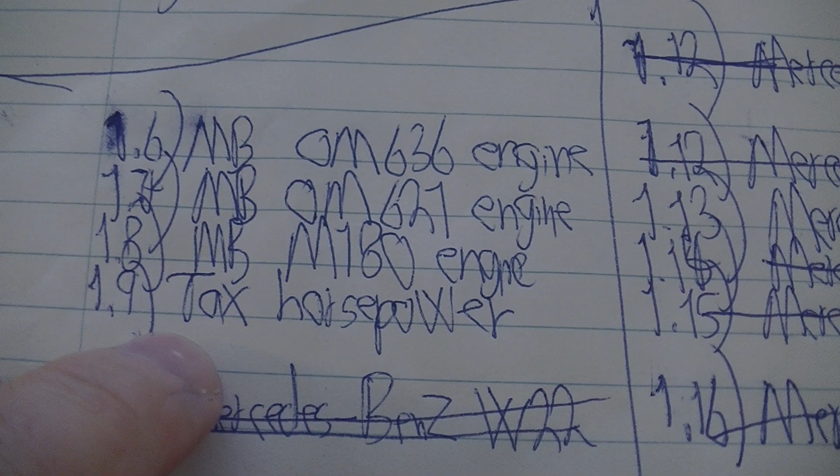Yes, I need to adjust the camcorder a little bit. Yes.

No, they are too old, they are too old and expensive. But I could get an old Mercedes from the 90s, like 1990 something, 95.

Mercedes-Benz 220 Cabriolet W187. Overview: Manufacturer Mercedes-Benz. Production 1951-1955, 18,514 built: 1. Saloon 16,154, cab. A 1,278, cab. B 997, Coupe 85. Body and chassis class: luxury car. Body style: 1951-54 4-door saloon, 1951-54 2-door Cabriolet B, 1951-55 2-door Cabriolet A, 1954-55 2-door coupe. Layout: front engine, layout powertrain engine 2,195 cc, 2.2L, M180 i6. Transmission: 4-speed manual. Dimensions: wheelbase 2,845mm (112.0 in), length 4,507mm (177.4 in) minus 4,538mm (178.7 in), width 1,685mm (66.3 in). The Mercedes-Benz W187 is a luxury car produced by Mercedes-Benz from 1951 to 1955.

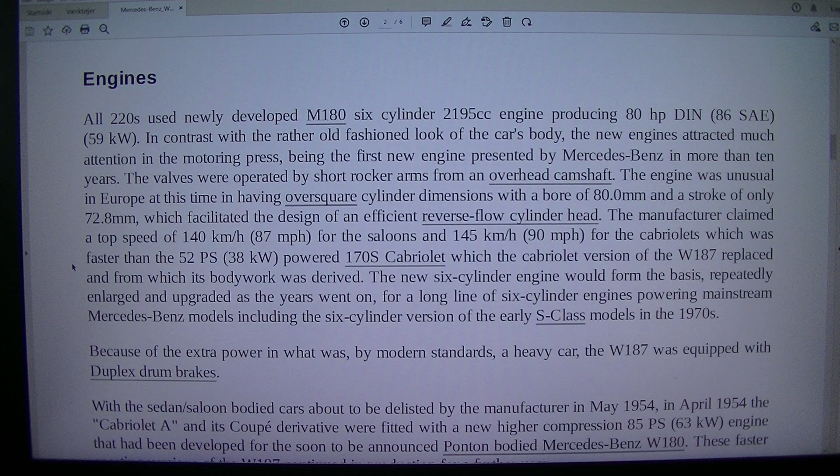Because of the extra power in what was, by modern standards, a heavy car, the W187 was equipped with duplex drum brakes.

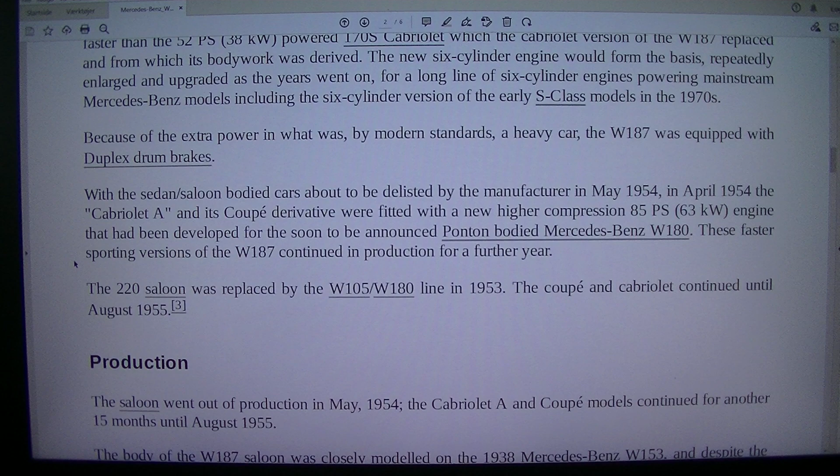With the sedan/saloon-bodied cars about to be delisted by the manufacturer in May 1954, in April 1954 the Cabriolet A and its coupe derivative were fitted with a new higher compression 85 PS, 63 kilowatt engine that had been developed for the soon-to-be-announced ponton-bodied Mercedes-Benz W180. These faster sporting versions of the W187 continued in production for a further year.

The 220 saloon was replaced by the W105/W180 line in 1953. The coupe and cabriolet continued until August 1955. Production: the saloon went out of production in May 1954. The cabriolet and coupe models continued for another 15 months until August 1955.

The body of the W187 saloon was closely modeled on the 1938 Mercedes-Benz W153, and despite the modern engine that powered it, already looked old-fashioned to many observers on the day it was introduced.

Two years earlier, in 1949, the Borgward Hansa had served notice that car design had moved on since the 1930s, and the manufacturer's own 1953 W120 confirmed that modern European cars were following the North American trend toward lower, wider-bodied designs. This has been seen as an explanation for the W187's own unusually short production run of slightly above 3 years for the saloon and less than 5 years for the longest-lived of the cabriolet models.

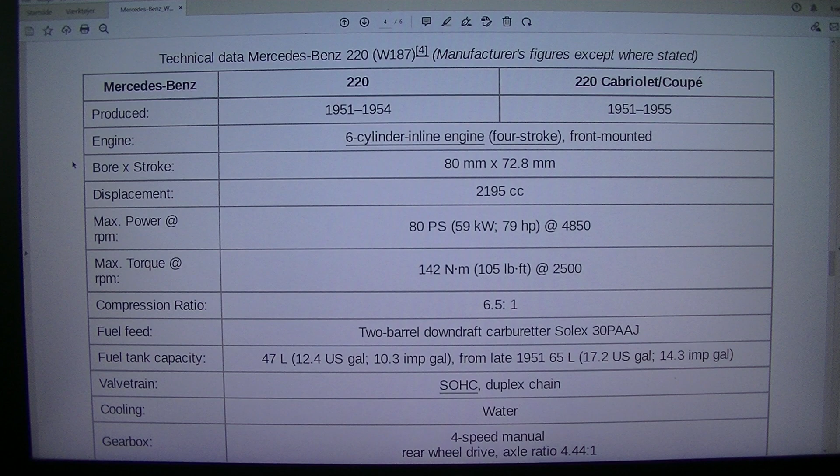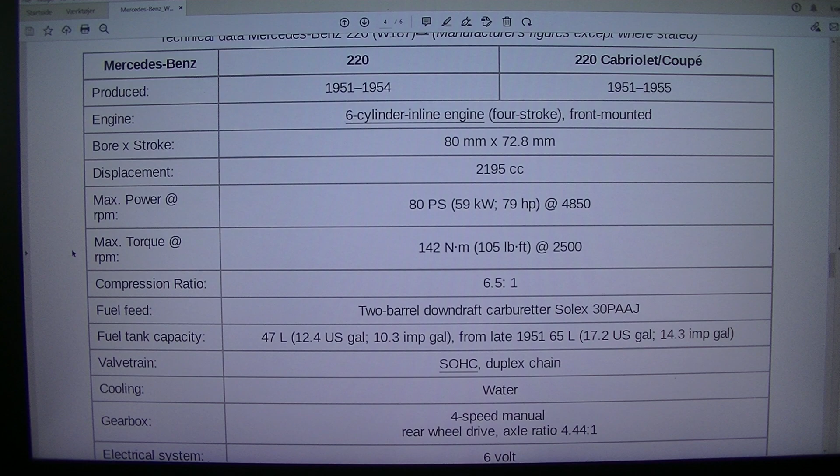Specifications: technical data for the Mercedes-Benz 220, W187, manufacturer's figures except where stated. Mercedes-Benz 220 and 220 Cabriolet/Coupe produced 1951 to 1954/1955. Engine: 6-cylinder inline engine, 4-stroke, front-mounted, 80 mm x 72.8 mm stroke, 2195 cc displacement. Max power 80 PS, 59 kilowatts, 79 HP at 4,850 RPM. Max torque 142 Nm, 105 pound-foot at 2,500 RPM. Compression ratio 6.5:1. Fuel feed via 2-barrel downdraft carburetor, Solex 30PAAJ. Fuel tank capacity 47 liters, 12.4 US gallons, 10.3 imperial gallons; from late 1951, 65 liters, 17.2 US gallons, 14.3 imperial gallons. Valvetrain: SOHC, duplex chain. Cooling: water. Gearbox: 4-speed manual.

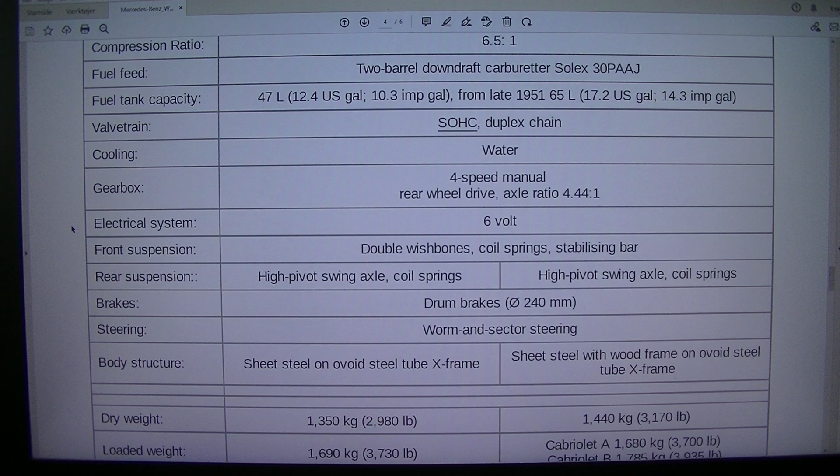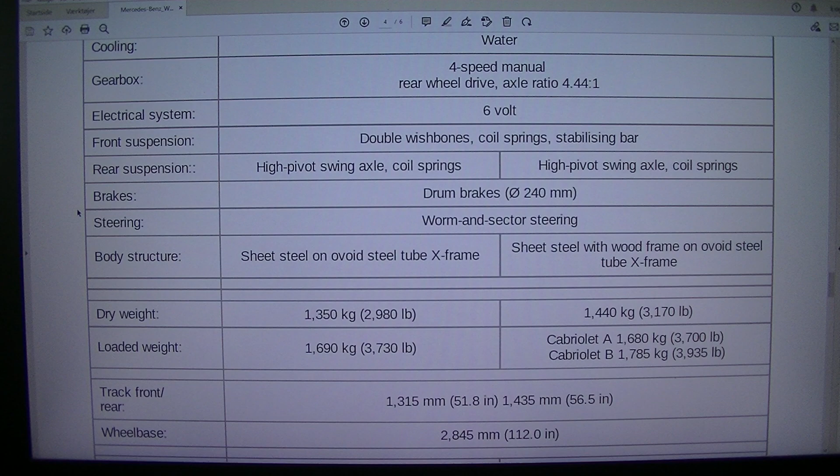Rear-wheel drive, axle ratio 4.44:1. Electrical system 6-volt. Front suspension: double wishbones, coil springs, stabilizer bar. Rear suspension: high-pivot swing axle, coil springs. Brakes: drum brakes, 240 mm. Steering: worm and sector. Body structure: sheet steel on ovoid steel tube X-frame with sheet steel and wood frame on ovoid steel tube X-frame.

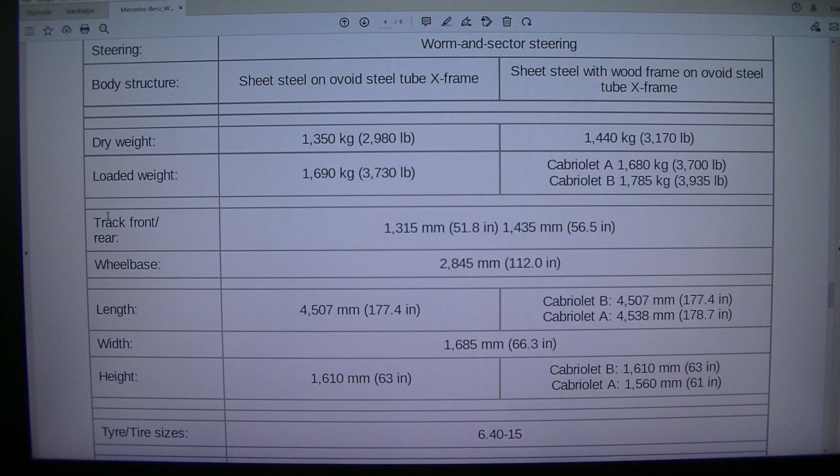Dry weight 1,350 kilograms, 2,980 pounds; 1,440 kilograms, 3,170 pounds. Loaded weight 1,690 kilograms, 3,730 pounds for the cabriolet; 1,680 kilograms, 3,700 pounds for the cabriolet B; 1,785 kilograms, 3,935 pounds. Track front/rear 1,315 millimeters, 51.8 inches; 1,435 millimeters, 56.5 inches.

Wheelbase 2,845 millimeters, 112.0 inches. Length 4,507 millimeters, 177.4 inches for the cabriolet B; 4,507 millimeters, 177.4 inches for the cabriolet; 4,538 millimeters, 178.7 inches. Width 1,685 millimeters, 66.3 inches.

Height 1,610 millimeters, 63 inches for the cabriolet B; 1,610 millimeters, 63 inches for the cabriolet; 1,560 millimeters, 61 inches. Tire sizes front/rear.

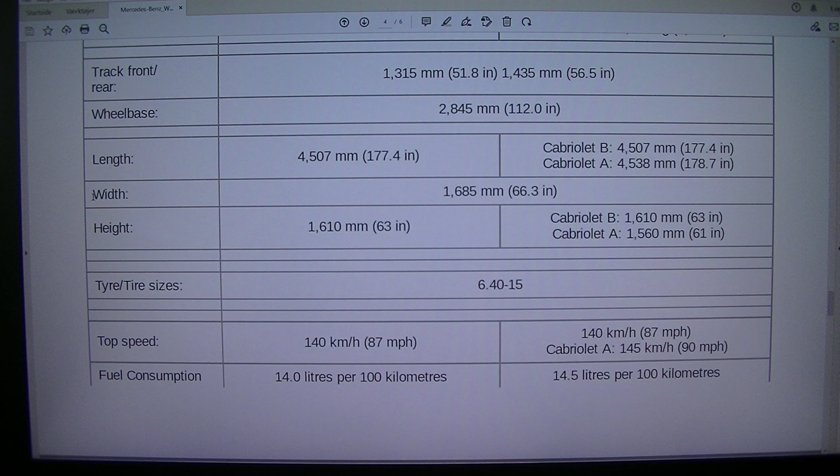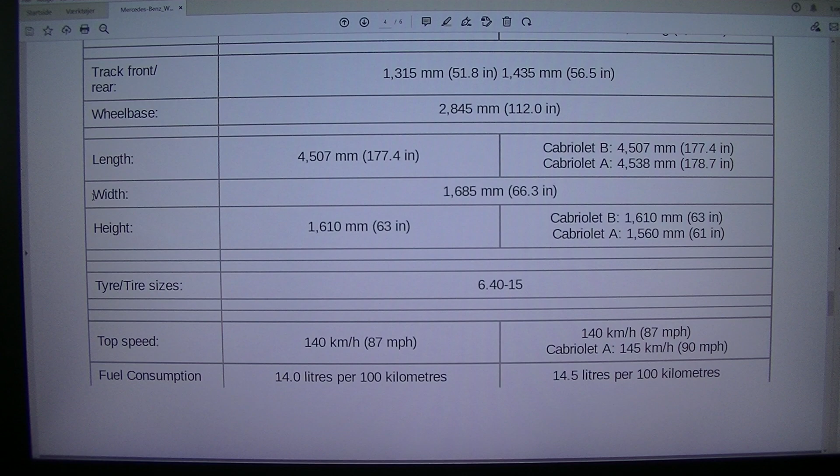Tire size 6.40-15. Top speed 140 kilometers per hour, 87 miles per hour; for the cabriolet, 145 kilometers per hour, 90 miles per hour. Fuel consumption estimated at 14.0 to 14.5 liters per 100 kilometers, equivalent to about 20.2 mpg imperial, 16.8 mpg US, or 19.5 mpg imperial, 16.2 mpg US.